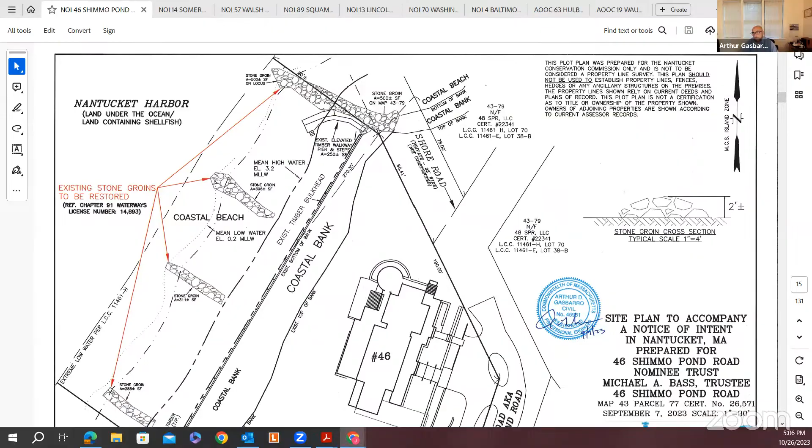Dan had also filed a letter, should you have any questions for him related to his correspondence. Any questions from commissioners?

Joe: Is this considered a grandfathered situation? Well, if you're asking me, I would say that could go either way. I'm quite sure Mr. Bailey—good evening, good afternoon, Mr. Bailey—will argue that it is grandfathered, but of course the house that is nominally being protected by it was built when, Art?

Three years ago? I can't hear you. The house was reconstructed a few years ago. Right, yes. So it's pretty clear in our local regulations—in fact, I'll read from it, performance standards: no coastal revetments or coastal engineering structures of any type shall be constructed, rebuilt, or repaired. I think you could argue that whatever the Chapter 91 license, since it was granted three years ago, Art, am I correct?

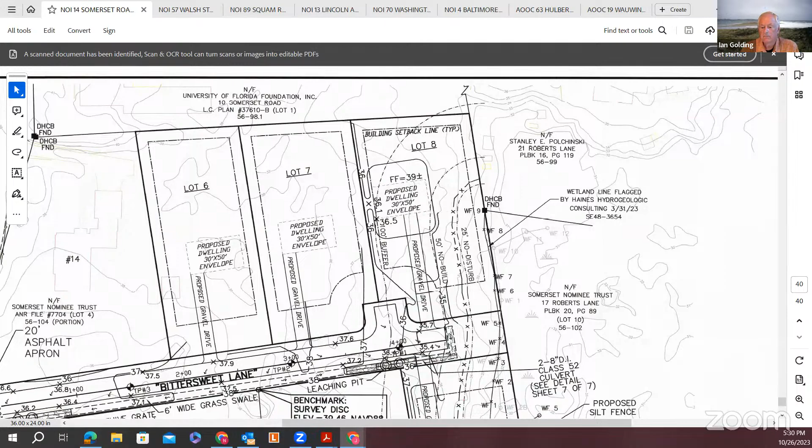Paul, could you explain the road layout a little more? It seems like a fairly steep gradient. Is that going to have any effect on the wetland, or is it just that I'm not very good at reading plans? No, it's not very steep at all, actually. The roadway setup is completely gravel base. The end of the road has a drainage system consisting of a stone channel which feeds subsurface leaching pits. There is then a grass swale on the southerly side of the roadway connecting the drainage areas. So all the drainage is basically connected to a subsurface system. Nothing flows towards the wetland area, and the grade itself is not very steep at all, Ian.

Great, thanks Paul. That was the subject of the prior, there is an existing notice of intent just for the construction of the roadway within your jurisdiction.

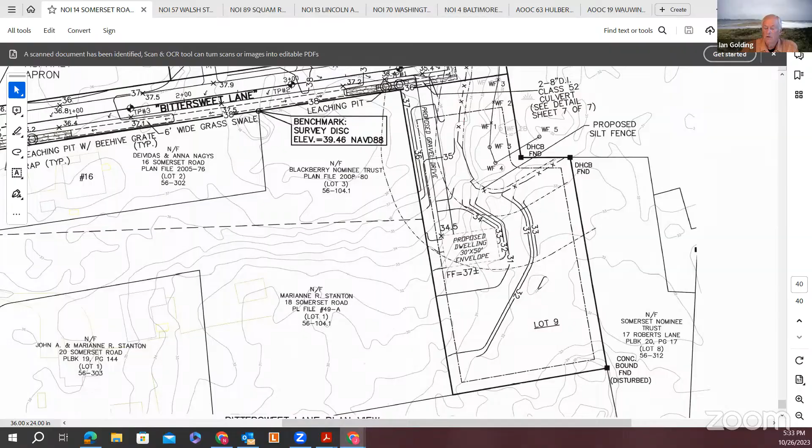Thank you, Paul. Any questions? I guess I neglected to ask about the landscaping. Are there any proposals for landscaping at this point, between the 25 and 50?

At this point, these are generic building envelopes. Once these lots are developed further and there's a designer involved, I would suspect we'd be back before you with either a minor modification or an amended order specifically to deal with landscaping.

And maybe the exact house dimensions and so forth. Great, thank you, Paul. Any questions from members of the public? And Paul, you'd like to close, I assume?

Yes, we do have a DEP file number and I would like to close. Great, and Jeff, we can proceed. So a motion to close, please. Thank you, Joe. And Tim, would you like to second?

Thank you, Tim. By roll call vote: Mark Beal, aye. Tim Brain, aye. Joe Plandowski, aye. Linda Williams, aye. Ian Golding, aye. Thank you, Paul.

Ian, if I could - I have two amended orders of conditions for the 4 Marinaway and 6 Marinaway subdivision. Those were requested to be continued today. I wanted to mention that, and I think the abutters were advised of that, but I don't know if that was mentioned at the beginning of the meeting. It wasn't, because I was unaware of it. Okay, all right, thank you.

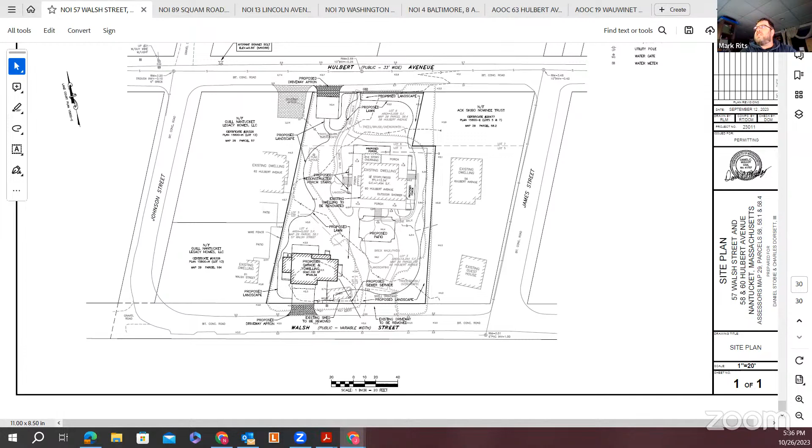The project before you this evening is a request to do some modifications to an existing residence, primarily the addition of some porches and reconfiguration of some stairs. The only resource area on the property is land subject to coastal storm flowage.

The second portion of the project is to construct a garage dwelling on the southwestern corner of the property. This will be a slab on grade with flow-through panels to allow for proper flood zone flowage. There will also be some adjustment to existing landscaping on the property. We're not proposing any grading or fill - just some landscaped areas changed to different planting configurations, all native plant species. That's pretty much the extent of the project here.

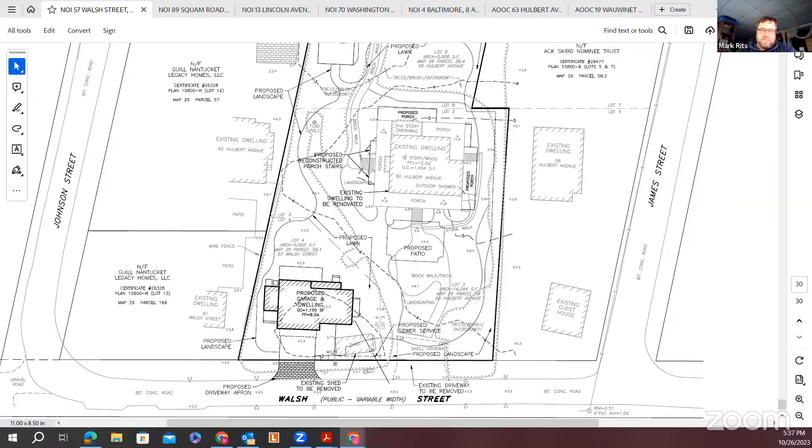Thank you, Mark. Would appear to be pretty straightforward. Is there any comment from commissioners or members of the public? Hearing and seeing none, Mark, would you like to close? Jeff, are we - you got all the info. Motion to close.

Thank you, Joe. Seconded by Mark. By roll call vote: Mark Beal, aye. Tim Brain, aye. Joe Plandowski, aye. Linda Williams, aye. Ian Golding, aye. Thank you, Mark.

That brings us on to Squam Partners LLC, 89 Squam Road. Art Gasbarro - thank you, Mr. Chairman. Before the commission is a project with notice of intent for a proposed pool with hardscaping within the 100-foot buffer zone to a coastal bank. There are also pool mechanicals and a small portion of the patio within 100 feet of the vegetated wetland, approximately 90 feet away from that area.

The pool and the patio are outside of the 50-foot buffer zone to the coastal bank. This is a very stable vegetated bank with a dune at the base. It's not eroding. We believe the project meets all the relevant performance standards. We will request a continuance as we are waiting for final review from Natural Heritage, but we'd like to know if there are any questions or additional information needed from the commission.

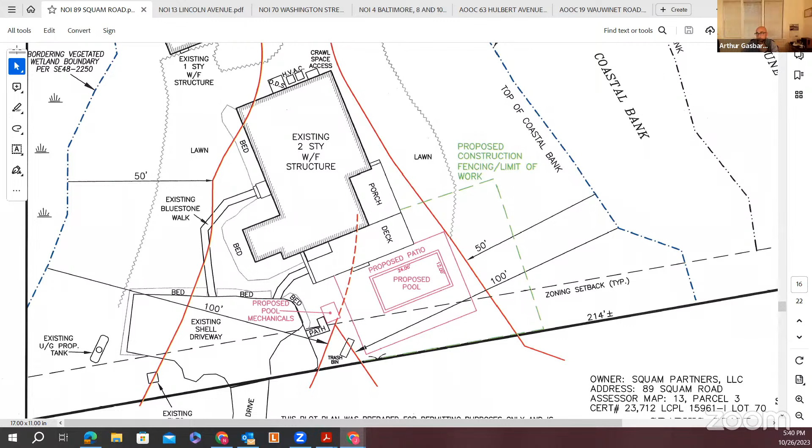And that brings us on to Seven Doors Nominee Trust, 13 Lincoln Avenue. And you're up again, Art.

Thank you, Mr. Chairman. Very similar application. We are proposing a pool. This time we are within 100 feet of an isolated vegetated wetland. This is up on top of the hill at Lincoln Circle, and there is a coastal bank on the abutting property. We are greater than 50 feet away from both resource areas with the pool.

Some of the hardscaping is within 50 feet. There's no work proposed within 25 feet. This is all within an existing landscaped area on this particular property. There's actually a patio and it's above a retaining wall, and all the work would be in very close proximity to the house, as you can see on the plan.

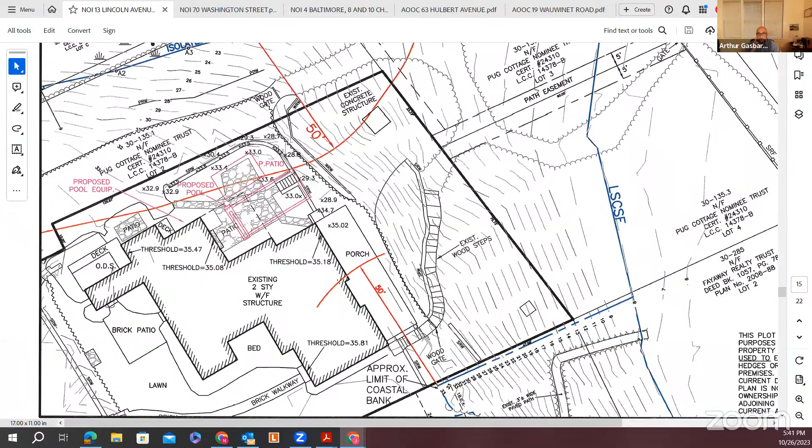We believe there would be no adverse impact on any of the interests protected by the commission. The access would be from the paved road at Lincoln Circle around the house, and we'd be happy to address any questions or concerns. We understand and would, of course, accept the standard conditions that the commission has been imposing for pools in the buffer zone.

Thank you, Art. Any questions? Linda? From the map, it looks like the edge of that pool is right smack on the edge of the bluff with no setback at all. So if you're sitting in that pool, you're looking straight down the hill.

I'm well familiar with the property. I lived at 10. My grandparents almost bought 7 doors, except that the doors were literally only 6 feet high, and they said, forget it. So I'm well familiar with this property, but I'm just concerned about the site plan. It looks like, if you hang on the edge of that pool, you're looking straight down the hill, right on top of the edge of the bluff. Is that the correct reading of that plan?

Through you, Mr. Chairman? Yeah, absolutely. Art? There's an existing retaining wall, and so we would be staying behind that retaining wall. And yes, the slope that's there is downhill from the pool, if you will, but we don't have any particular concern with the siting of that. I'm not sure that it would fall under any of the performance standards related to the Wetlands Protection Act or the local regulations.

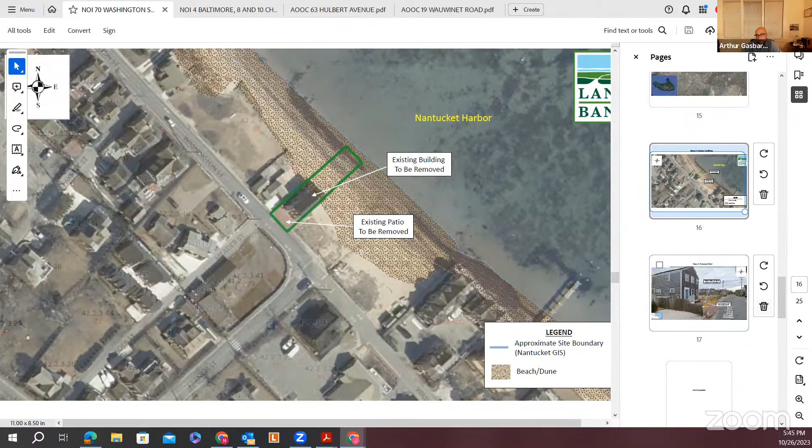Mr. Chairman, I'm going to represent this application for the land bank, represented by Art Gasbarro. So this is a notice of intent for the removal of the existing structure and restoration of the disturbed area around there. Also removal of the existing patio and then the installation of a split rail fence parallel to the road. I think it's a clear net benefit project to the protected interests, an improvement really to wetland scenic views. With that, I'd be happy to address any questions or concerns that you might have with the project.

Thank you, Art. Any questions? Any questions from members of the public?

Not too many houses left along Washington Street. What? Not too many houses left along the street. No, for good reason. It is a velocity zone.

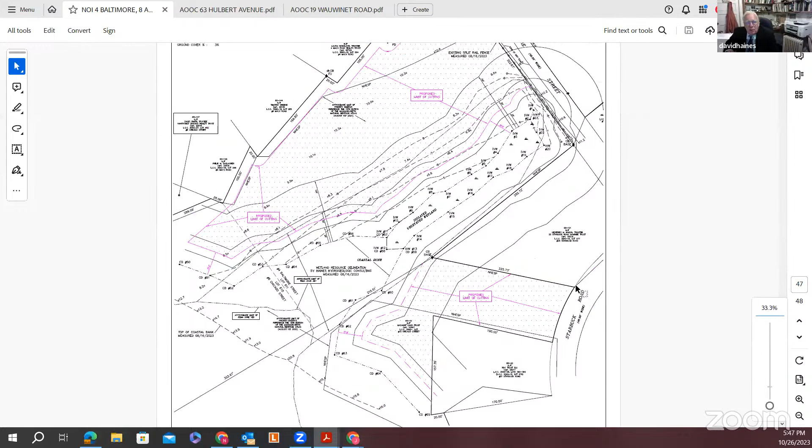This is a notice of intent, very similar to one we did last winter at 3 Baltimore. This is across the street. It's 4 Baltimore, but also includes other parcels, 8 and 10 Chicago and 30 Starbuck. The two on Chicago are within the buffer zone and contain resource areas. The 30 Starbuck is completely outside, but we included it because we had to go to Natural Heritage on this whole thing, so we bundled it all together as one.

This is a proposal to continue what's been done for a while: seasonal or yearly, or less than yearly, mowing of the area to manage vegetation, keep it down as sandplain grassland, sandplain heathland, create a fire break, and several other reasons.

Nantucket Land Trust has been doing this, and they did stop three years ago when they started to ask the question: do we need a permit for this? And I said, well, it would be a very good idea. You are in the buffer zone, and there's a vegetated wetland through the middle.

I don't know if Jeff has had a chance to look at it. It's very strange. There's land subject—it's right on the ocean. The beach is to the south, Nantucket Beach. There's a coastal dune on lots 8 and 10 Chicago, which are across the front, and they tie into a vegetated wetland—an isolated vegetated wetland between the dune and Baltimore Street. There's also land subject to coastal storm flowage, overwash across the dune that extends into the property.

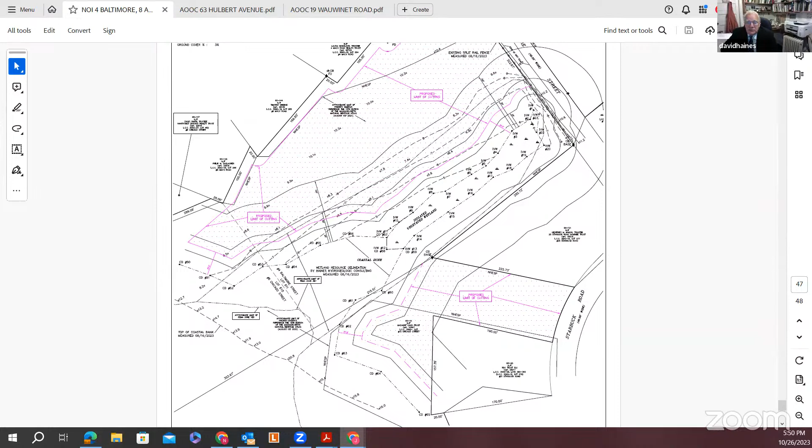Thank you, David. Any questions? Joe? I seem to recall that we got a letter from a resident of that area who was complaining about something being cut down that either shouldn't have been, or something to that effect. I can't locate that letter right now, but that's what I recall.

I could—please, thank you, David. Yeah, I don't know if it's the same person or not, Joe, but a person named Mr. Arthur Tiger made a phone call to me. I did talk to him. I recommended he talk to Tony Butler, who's running this for the land trust, about his concerns. I don't know if it's the same person, but we seem to have satisfied his concerns that the shrubs in back of his house would remain.

That area, if that is it, is the area over on Starbuck, which is outside your jurisdiction, but it's also an area that's been mowed for at least the last 15 years. So I think we've satisfied him, but I would like to find out who that is and have Mr. Butler speak to him to satisfy any concerns.

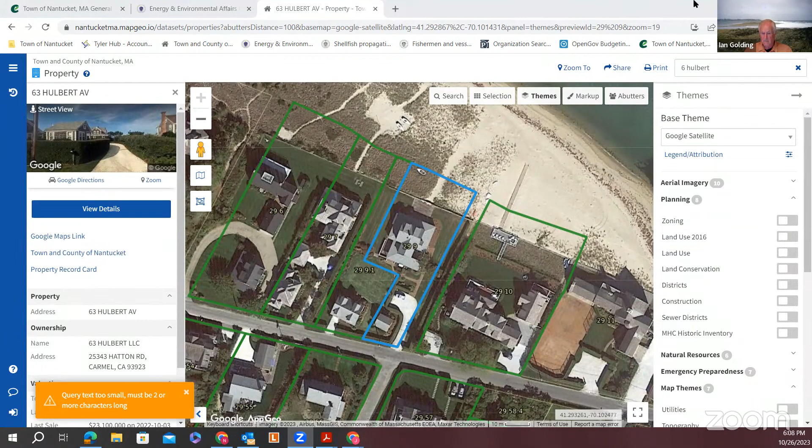It does, but it's continuous from the house to the bulkhead, and it's not shown as such on the plan. So if you're looking at... oh, I see, right, okay, sorry, it's tough because between the green line and the red line, the bulkhead line, it gets tricky because those lines stack up and it's hard to tell. But it does show it.

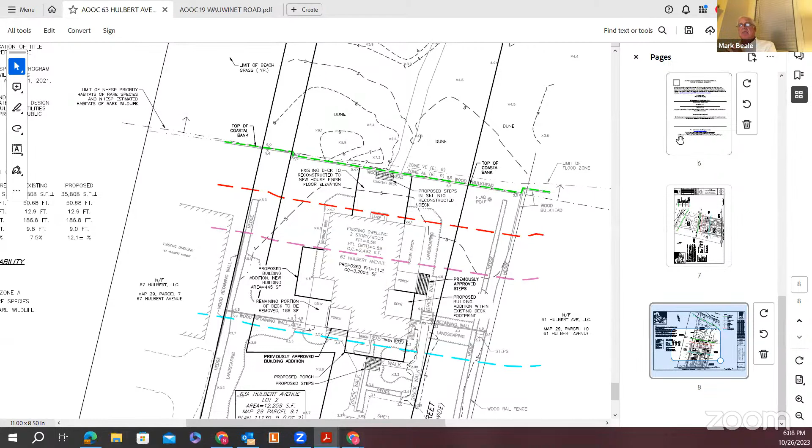Thank you, the penny has dropped finally. Thank you for your patience. So, Mark? Yes, no, thank you. I think that does help me too, because with the stairs integrated into the deck, I think that's a solution that works. Okay, good.

So thank you, Jeff, and thank you, Mark Beale, for bearing with us. Are there any further questions from commissioners or members of the public? And if not, hold on.

One second, Mr. Chairman, we have a couple comments on the YouTube. I don't have that on my screen. All right, I do. So just to read those.

All right, so Ian, yes, Mark—that question, I think, would be before the HDC, wouldn't it?

Jeff? Is that something we'd like to consider, to ask for a cross-section for watershed views, I suppose? And because Mark, you brought that up initially, and now with an abutter wanting to participate...